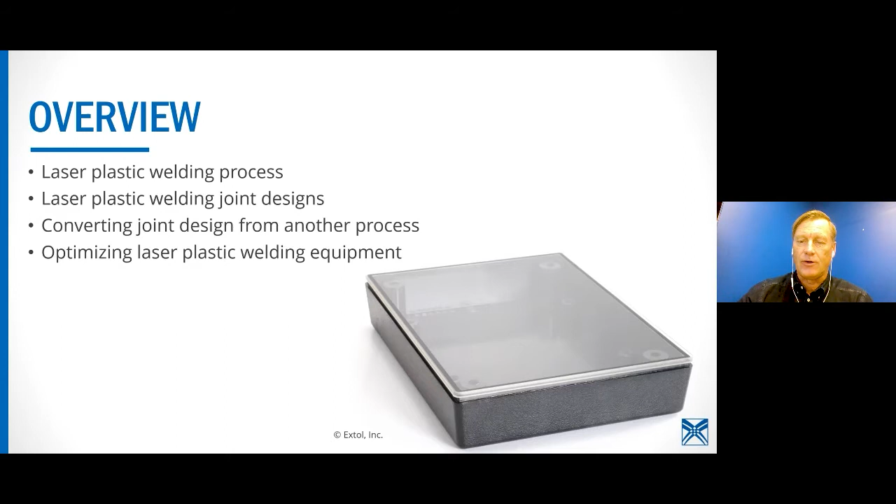Okay, so let's do a quick review of the laser plastic welding process. The three steps are clamp, heat, and hold. A clamping tool presses together the parts to be joined. The laser beam penetrates through the transmissive component with some energy loss and melts the surface of the absorbing material, shown in black in the image.

Heat transfers via conduction to plasticize the adjacent surface of the upper transmissive material. This process is precisely controlled and continuously monitored during laser welding to ensure a repeatable quality weld. After resolidification, the two parts at the joint have been reliably and cohesively bonded. A properly designed weld joint can result in a near parent material weld strength.

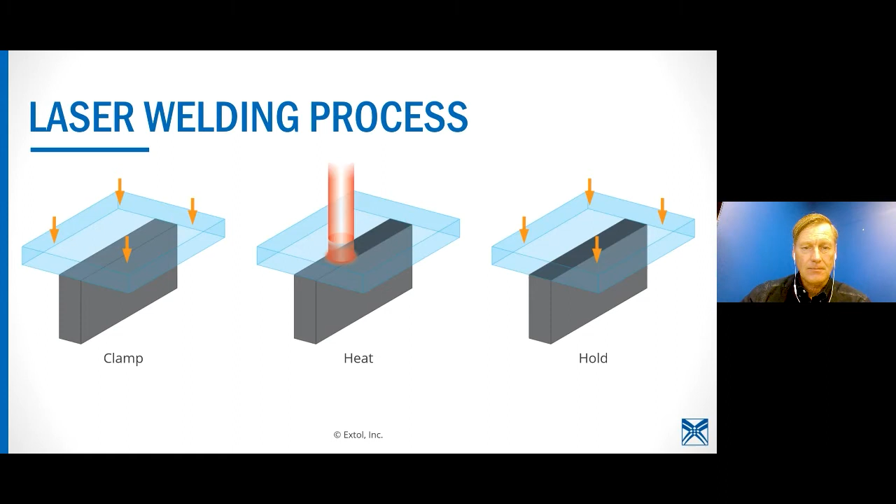The three key elements that we see for getting a successful laser weld are the following: intimate contact, IR transmissivity and absorptivity of the material, and the compatibility of those materials. As we described in the last slide, energy from the lower absorptive component conducts to the upper component. To ensure proper heat conduction, there must be intimate contact during welding.

The next two key elements are material specific. Transmissivity and absorptivity of the upper and lower layers, respectively, allows for the through transmission laser welding to occur. Transmissive is not the same as transparent. Transmissive materials can appear almost opaque to the eye. On the flip side, most absorptive layers will be opaque. However, absorbing materials are available that can make clear plastics absorb the laser wavelength.

Material compatibility is directly related to weld strength. Like materials will provide the best opportunity for maximum weld strength. Plastics with similar properties such as chemical makeup of the polymer chains, as well as the melt temperature and melt flow, can also be bonded using laser plastic welding.

In future webinars, we can go deeper into some of the material factors such as melt temp overlap, reflection, absorption, transmission, scattering, and refraction. All things that go into successful laser welding. We'll share a material compatibility chart later in this presentation.

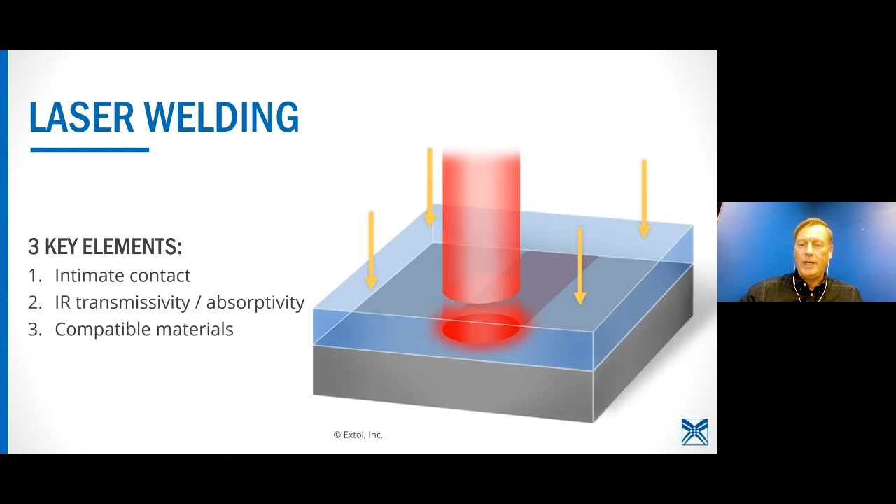Material is another key to this process, and Extol has experience and partners in the plastic material world, so we can be an extension of your design team.

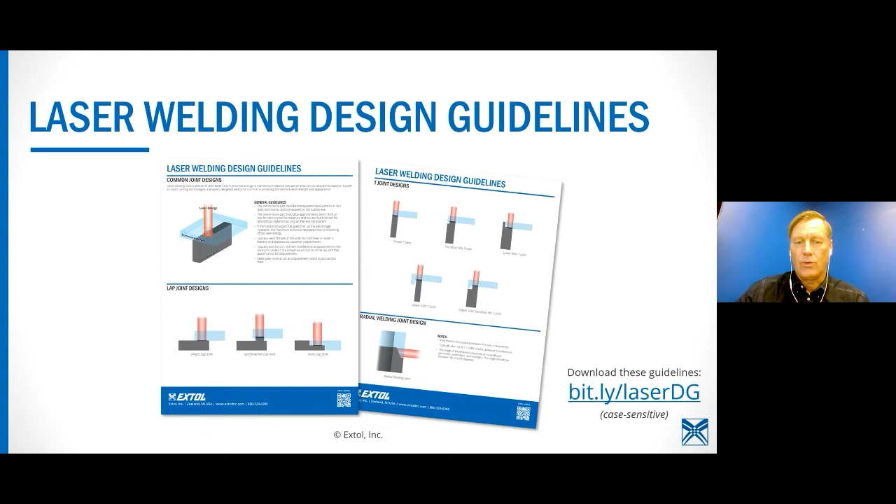So the first one, a simple lap joint. Lap joints are the simplest of designs. Very often they are the entire part on a single plane. As described, the parts that utilize this type of joint overlap each other partially or completely. Typical applications include microfluidics, screens, or textile embedding. Due to the typically large weld area, the weld collapse is smaller than a T-joint, which will be covered later.

We are currently working on an application welding an extruded tube to a thermoform tray with a simple lap joint. Another application we're working with utilizing this type of joint is welding a film to an injection molded base for a medical test application. So as noted here, plan for 0.1 to 0.2 millimeter collapse. That's not a lot, but because of the large surface area, that's fairly typical. And as I mentioned, microfluidics, films, screens, and textile embedding are some of the applications it's used on.

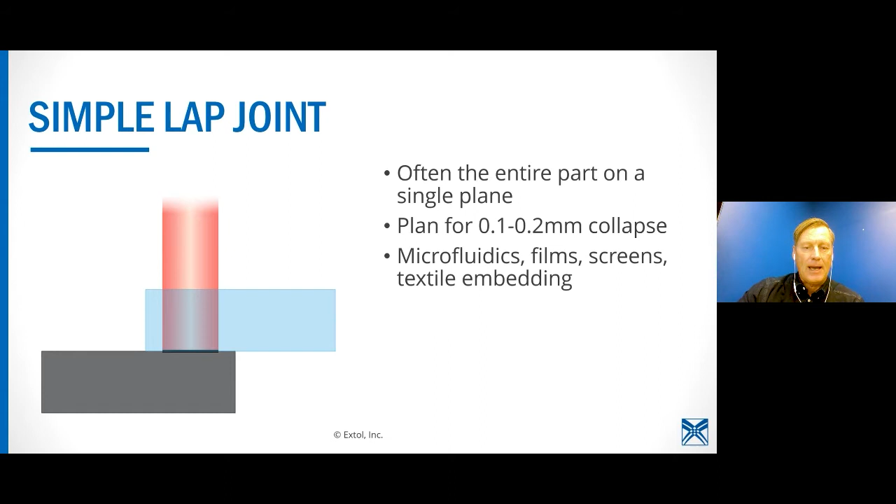Another lap joint would be the inline. And this might be used for something where you're trying to have a flush surface, or maybe something that's inset. And so here, again, the 0.1 to 0.2 millimeter collapse is typical. And you will get no weld flash protruding using a joint like this.

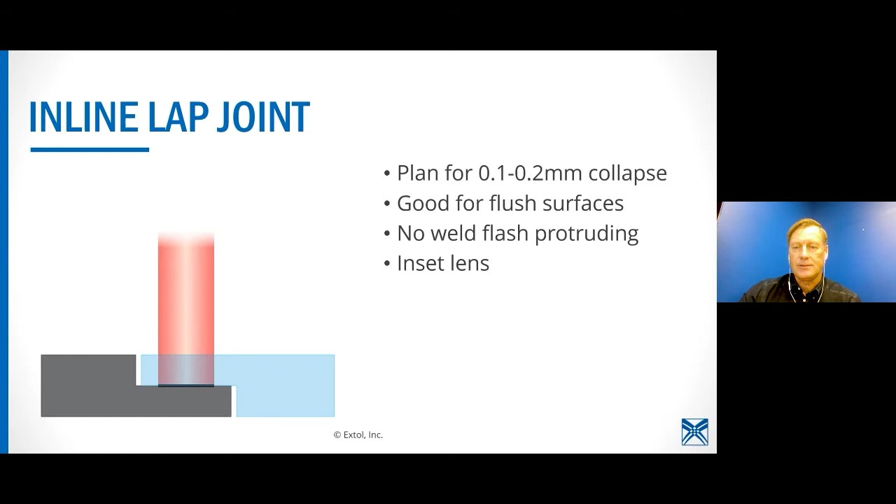Side by side here, we've got three common lap joints. Sacrificial rib joint, which we didn't cover earlier, allows for more weld collapse. The addition of this rib can also accommodate more molded part variation. So with that, let's jump to T-joints.

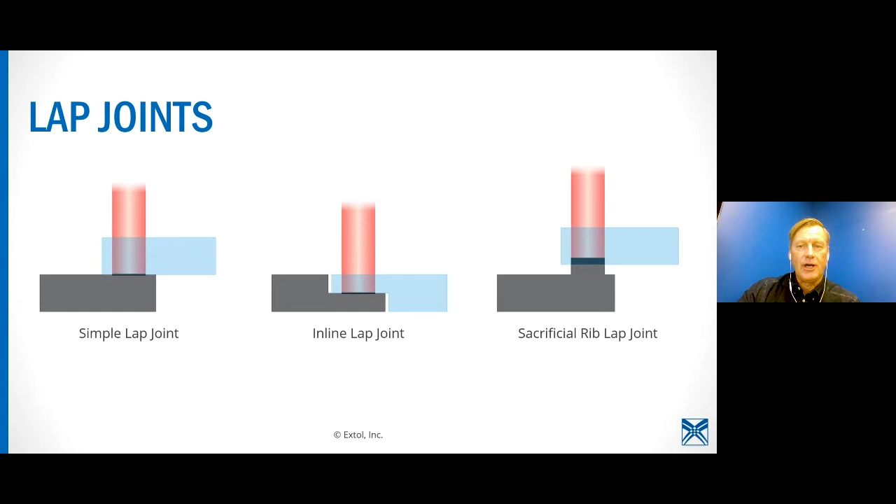T-joints are used on parts that, when assembled, have a joint that is typically perpendicular to the mating surface, thus creating a T shape. The T-joint is similar to weld joints you might see on vibration welding with that protruding collapse rib. Many ultrasonically welded parts use T-joints as well. Although the weld rib looks different, it's still a T-joint. They both can be converted to laser welding relatively easily.

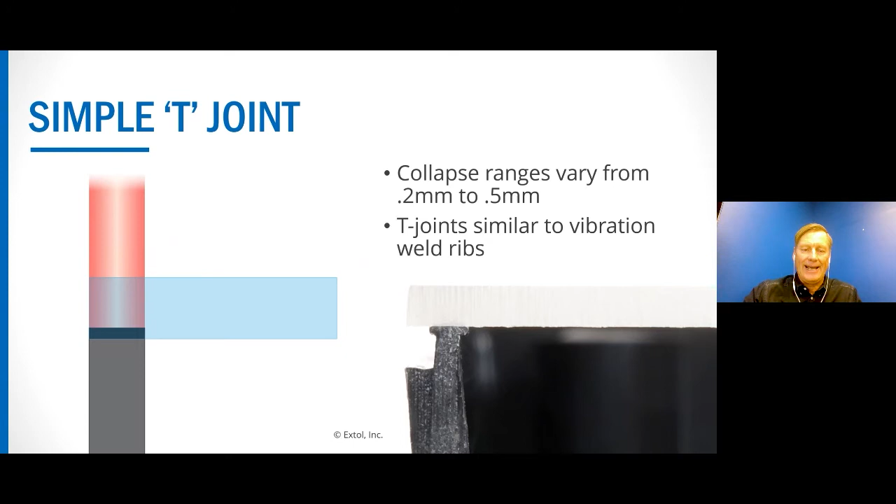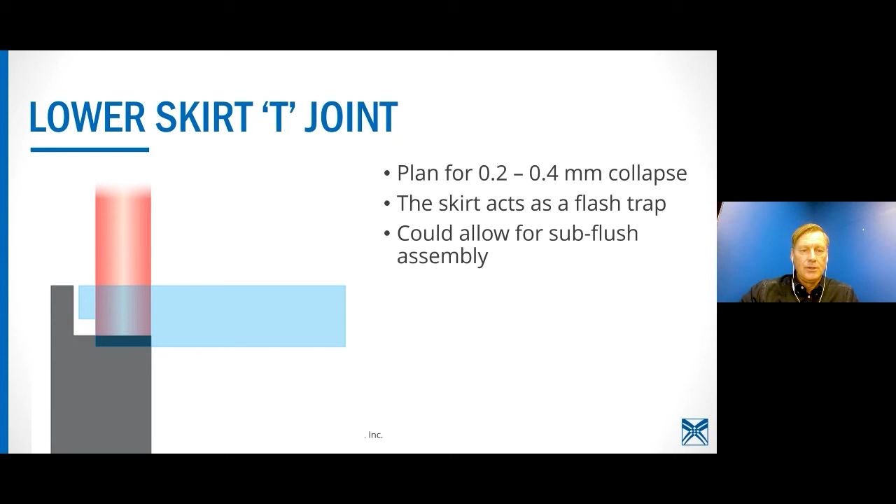The beam spot, as shown in the image, is the exact width of the joint. In reality, we tend to focus the beam spot such that it's slightly larger than the joint. This allows for any variation there might be in parts. And in this joint design, the larger beam spot allows for the ability to have some softening of the adjacent material to the welded interface.

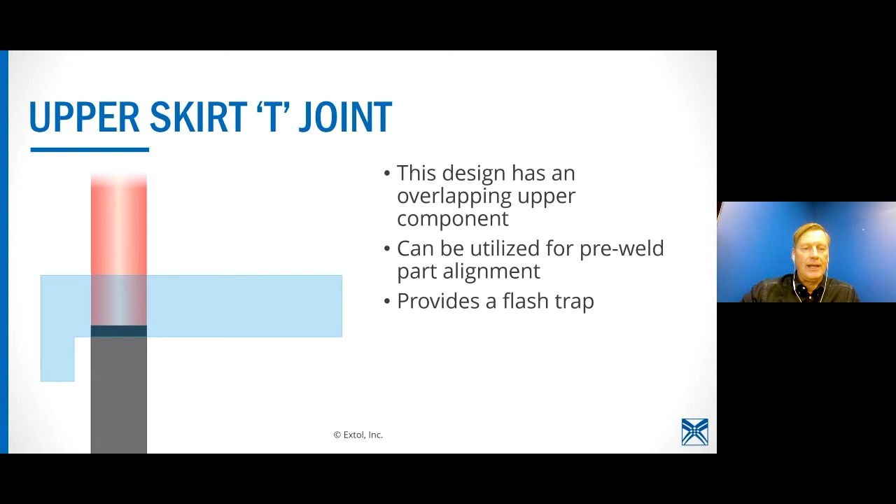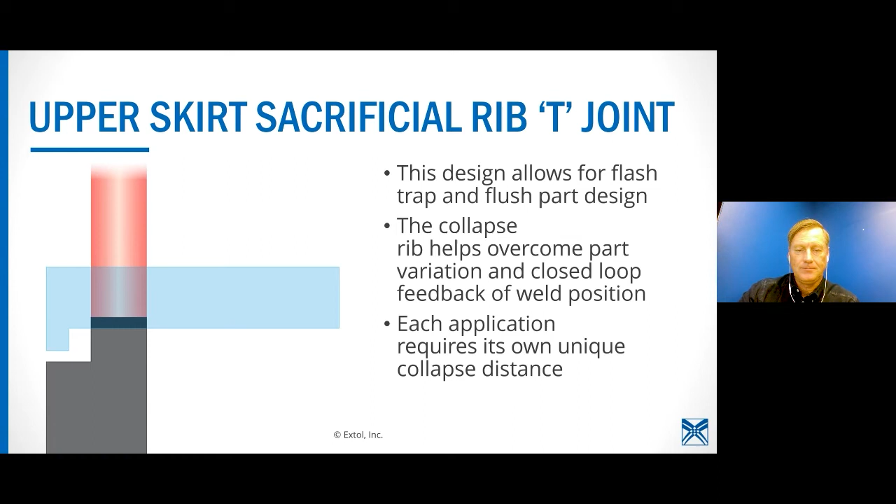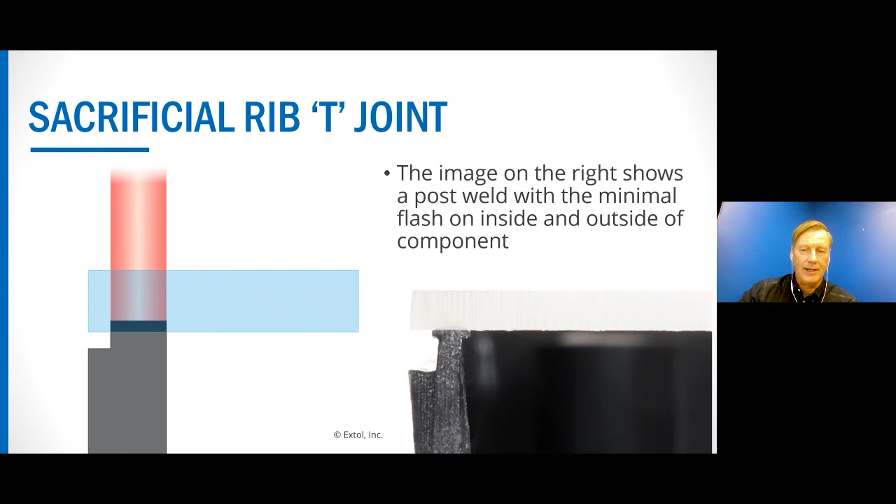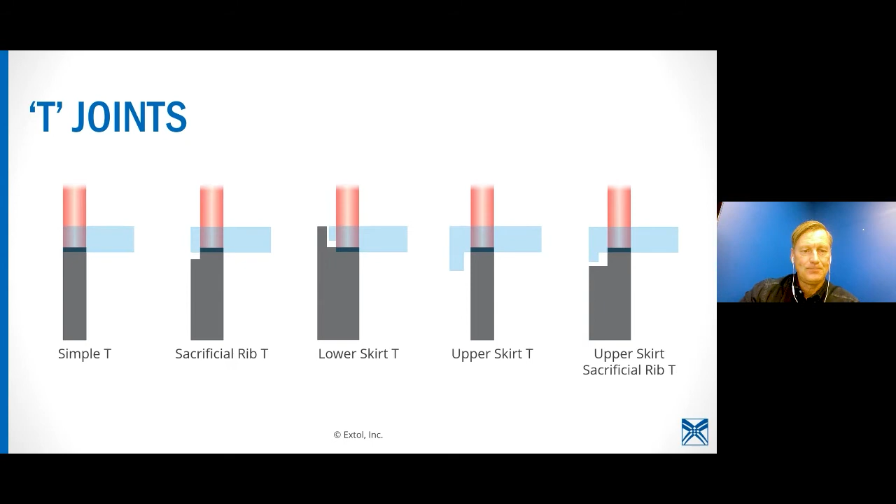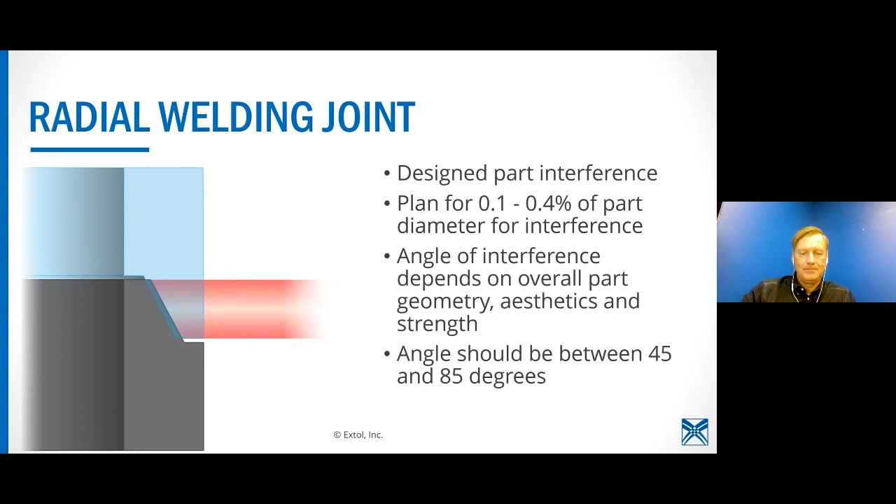Now we're going to jump into some of the examples we described as the next phase, and that is conversion of parts from one welding process to the laser weld process. And Nick Flesher is going to lead us through this.

Great, thanks, Drew.

We'll just get into a couple specific examples. Vibration welding to laser welding is something that we do commonly see. As you may know if you're on this webinar, laser welding can provide a substantially cleaner weld joint. And so that's the key reason we see customers come to us for a conversion of vibration welding to laser welding. Every weld technology has its strengths and ways that could be better.

So we'll just talk around one specific application that we've seen. But the reason mainly is elimination of particulate. We do see as a byproduct of transitioning from vibration welding to laser welding that you can have material reduction, and that comes in the form of the return flange that may not be necessary, and in some collapse,

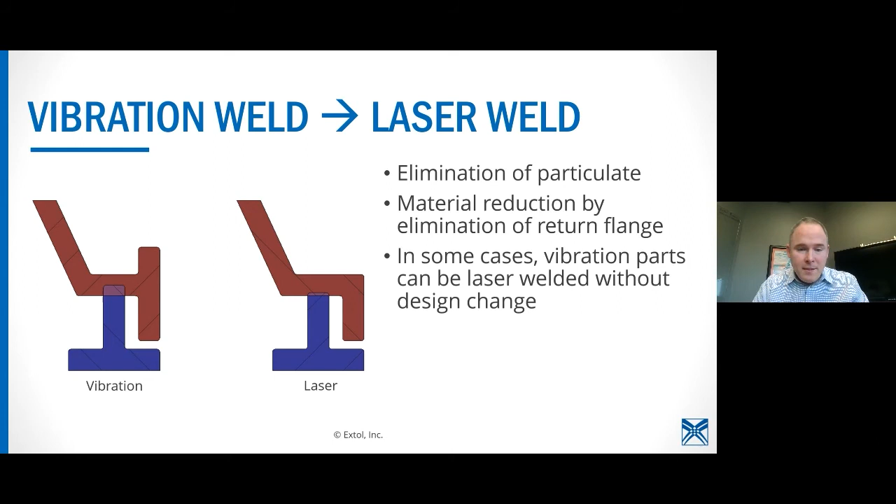In some cases, there's a couple key relationships we formed with some material suppliers that have optimized PBT, and then PC, ABS, which can be kind of stickier for hot plate. Vibe welds quite well, but can have some challenges with particulate. Those also can be converted successfully in many cases with laser welding.

Strength, as we've talked about, and then around this particular application, just to say what you might expect if you convert from a vibration weld to laser plastic welding. We saw in a case study where internal cleanliness showed a complete elimination of particulate, where that particular application was an underhood component, and it had unacceptable internal particulate.

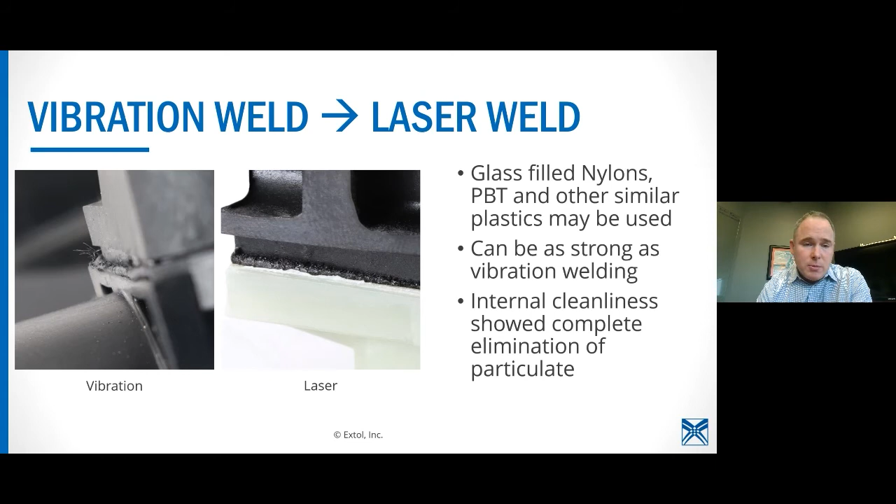So definitely feasible. In this particular case study, we proved feasibility and cleanliness without any design changes. So just keep that in mind. Typically, we see that we need 2.5 millimeters or so of transmissive thickness. So if you've got that sort of application, we'd love to take a look and see if it's feasible. You may not need changes to your part. In some cases, there are changes required, but we definitely can identify those in our applications lab.

For spin welding, very similarly to vibration welding, we've seen a handful of applications come through with that desire to eliminate particulate, and actually in most cases eliminate flash traps and provide opportunity to remove return flanges. So there again, there's some material elimination that can be required, minimizing that excess material.

As Drew mentioned, the parts are pressed together, and then the laser is applied radially, typically by mirror. In some cases, there might be other methodologies, but the interference that you can see based on these graphics shows a tongue and groove joint that was converted to an angle joint where we provided that intimate contact by the part design itself and proper tool design and press design.

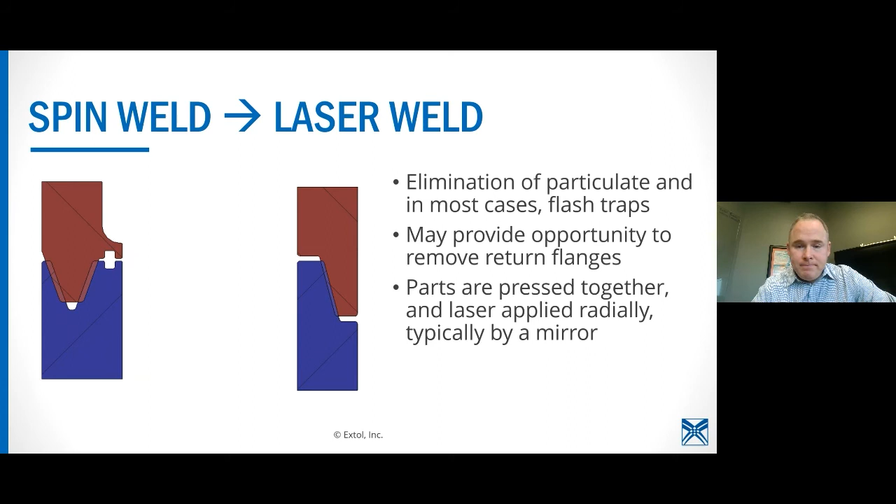Great. Thanks, Nick. Yep.

As we mentioned earlier, material compatibility is one of the keys to a successful laser plastic weld. And this chart, which was compiled by Dr. Klein, covers many of the most widely used thermoplastics. This can help when you have a situation where you need to have a different material in the lower than the upper. And this allows for at least an initial understanding of the weld quality when combining two different materials.

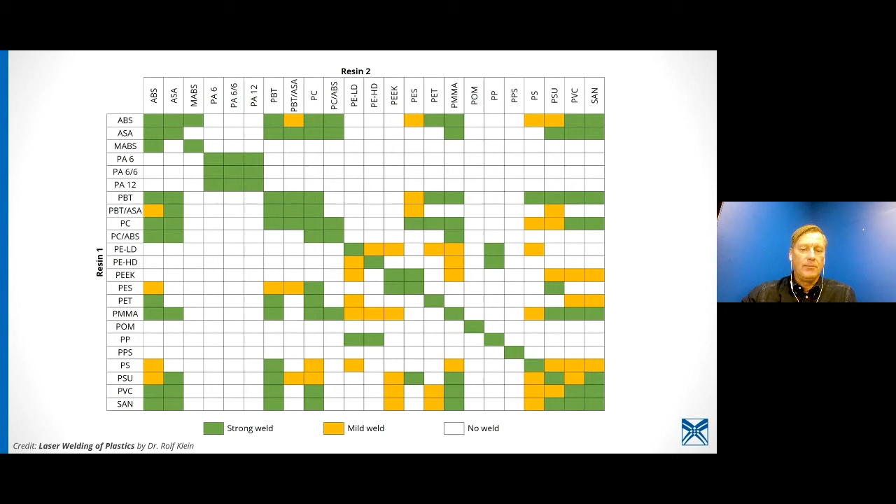And so let us help you with that. We can provide this information. You can ask us, we can dig into it. But at the end of the day, really, testing is best. And so we can also offer that as well. And of course, the other thing to remember is that transmissivity and absorptivity rules apply when you're doing different materials as well.

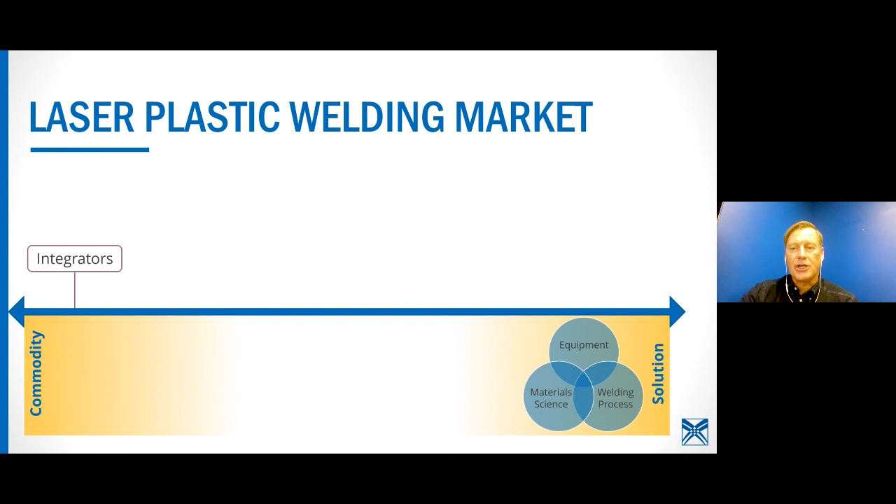From a market standpoint of where you can buy and work with companies getting laser plastic welding equipment and tooling, there's really a continuum from commodity to solution. And we like to show this because although there's many different ways to achieve what you need from an equipment and tooling standpoint, we believe that Extol provides the full turnkey configurable laser welding solution, which takes into account all the necessary items.

There's a lot of great integrators out there. We work with them as well. They're not 100% familiar with the welding process and the material science that goes into it. We can work with them, create a great solution. We also work with laser component manufacturers. Again, very good in their own expertise field, but they're often using laser for many other things than just laser plastic welding, for instance, cutting, marking, and metal work.

And then there's the standard plastic joining equipment builders. Again, pretty astute with many of the things that we're talking about here, but tend to want to put your product into one of 3 or 4 or 5 boxes. And so we think that the best solution is when we look at your application and configure the solution to best match everything that you need to provide the best manufacturing solution. And, we're talking to designers here primarily, when working with Extol, we can provide part, process, and equipment solutions from the very beginning of your concept and design process.

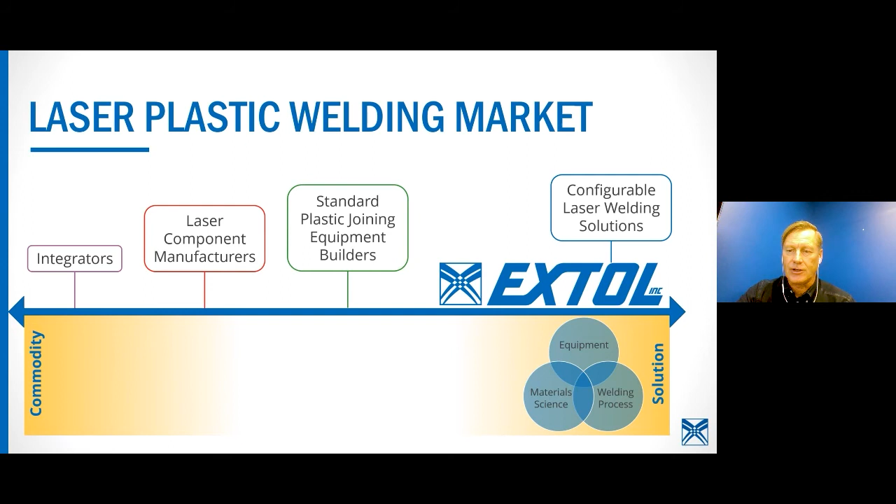So then we kind of get to that Venn diagram, and Extol sits right in the middle there. We believe that that's really important to getting the right welding solution. And notice I didn't even say right laser welding solution, because Extol also offers many other types of plastic welding solutions. And so we get the application, we're going to work with it and try to find the best for you.

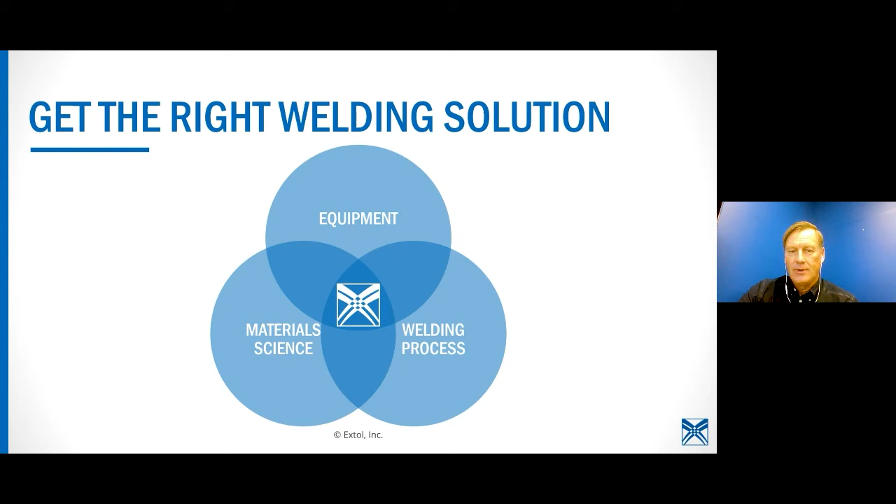At Extol, from a designer standpoint, we can help with specific part design suggestions that will optimize the strength and look of your parts, along with providing input that will increase the robustness of your process. Many times you just need more risk mitigation and empirical testing to prove your point. So we've got a lab welder where we can do testing, trials, samples, and prototype welding.

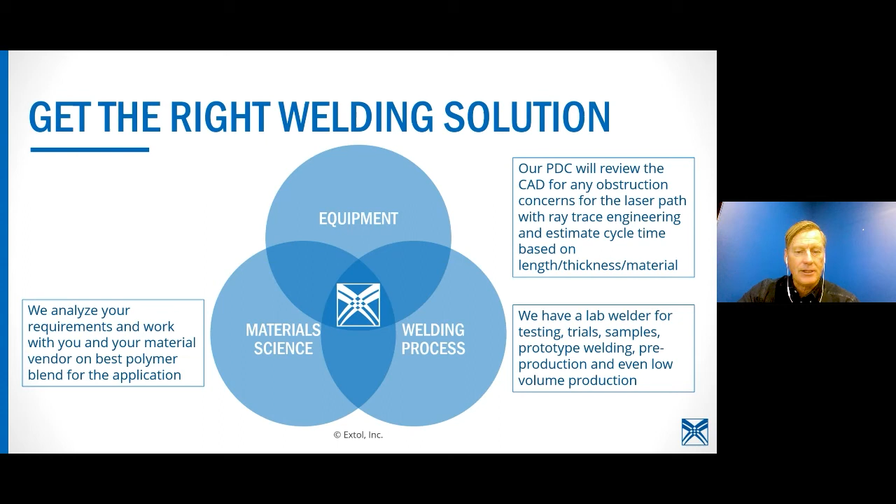Let us be your material experts. As you continue to navigate the daily grind of design challenges, we can step in, work with your material providers or our partners, and help with blends and different material optimizations that'll be best for your application. And lastly, many teams are cross-functional, and so if we're engaging with you, we can engage with your manufacturing and process engineers as well up front. And our team is very astute at DFA, DFMEA, and risk mitigation. All things that we want to leverage early on in your design project.

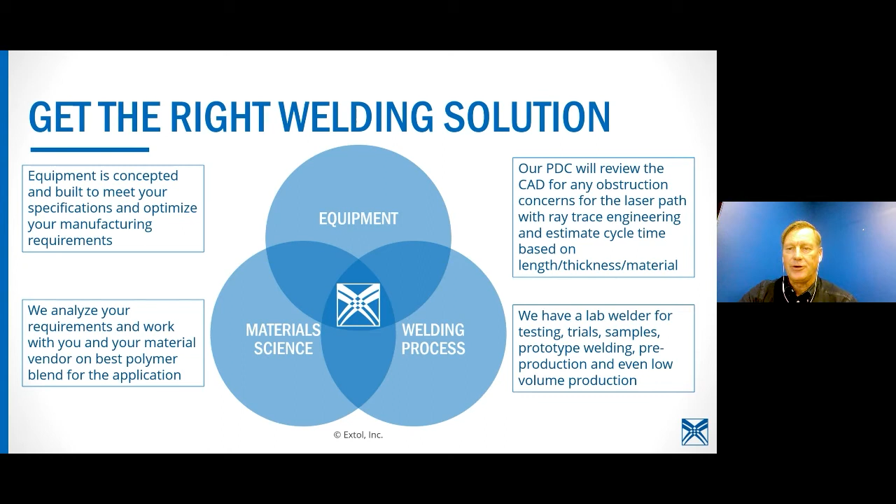So in plastic welding with Extol, Extol's team of experienced engineers is ready to work with your team from concept on into production. If you're wondering if laser is right for your design requirements, engage our team of experienced experts to help you get the right welding solution.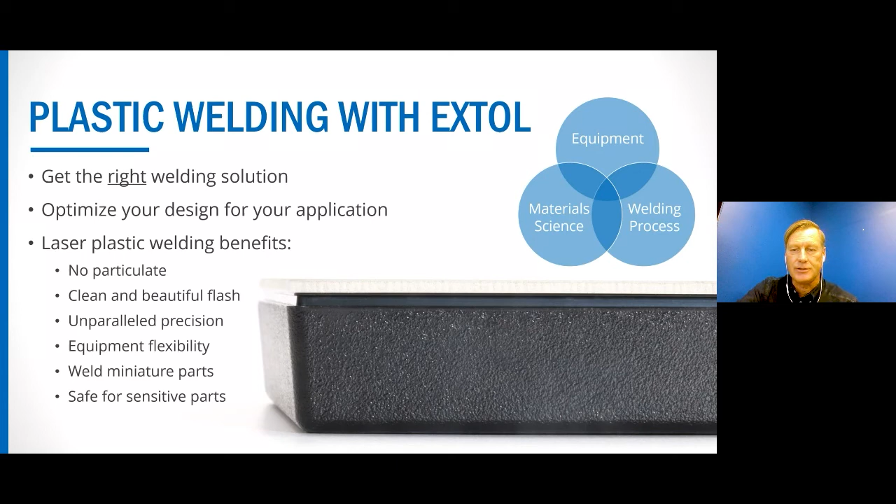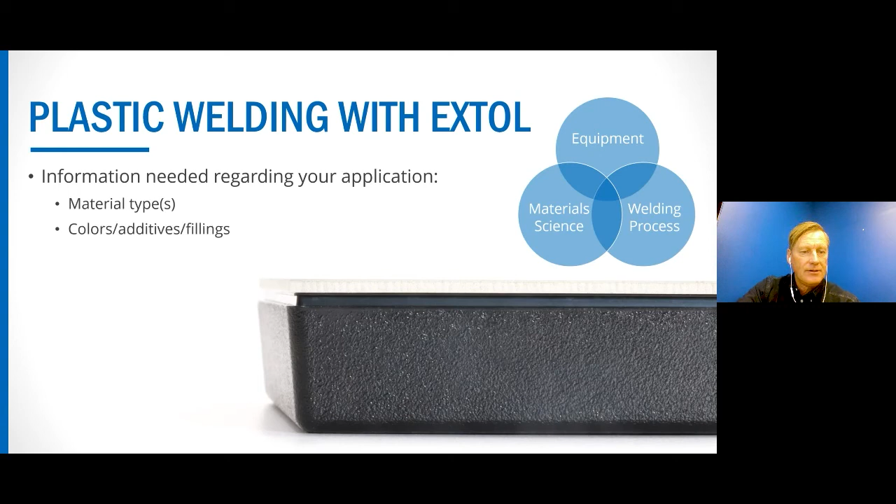To best serve you in the concept phase, we want as much information about your application as possible, including material types, colors, additives, fillings, the CAD or other drawings, what the function of your part is, and the requirements that go along with that. Things like weld strength, hermeticity. Cycle time is important to understand how best to approach it. What's your annual volume? And then the project timeline, of course.

So to best leverage your design and work with us, the earlier the better. It's been said that over 70% of the cost is established early on in the concept and design phase. And so the earlier you can engage and we can get this information and provide solutions, the better off it's going to be for all of you.